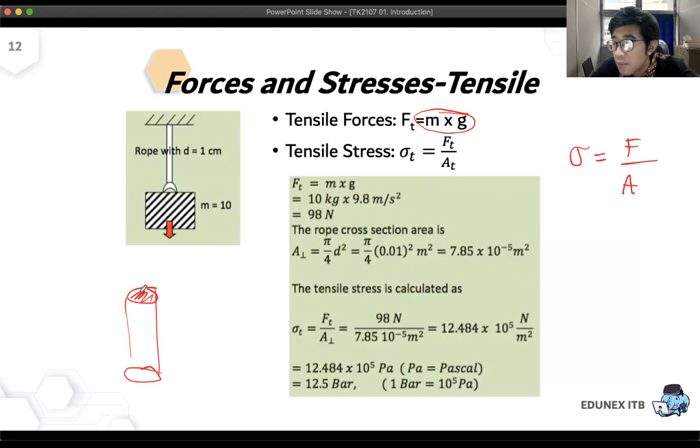So for this one, the area is the cross-section area. So it means if you have this type of rope, the area is this one. This one also is the same. So for the column or the cylinder, the area is this one. You call it the cross-section area, right?

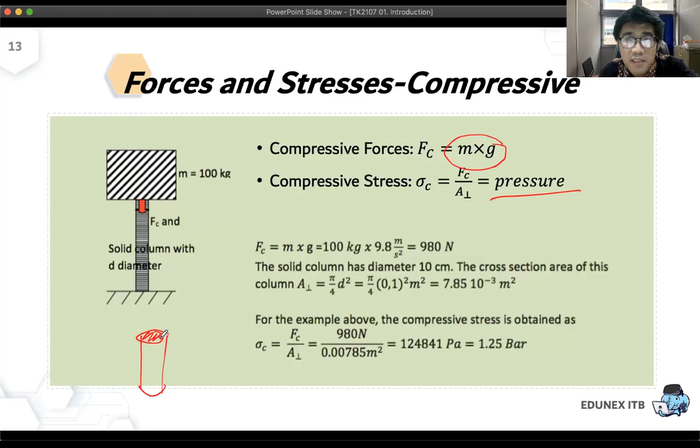Yes, sir, luas penampang. But for this one, the area to calculate the shear stress is this one, the whole... what do you call it? Luas selimut cylinder. What is it in English?

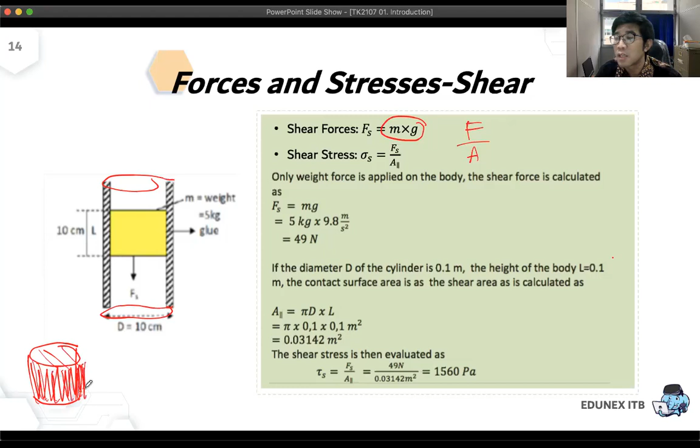Yeah, because the part that has contact with the pipe is this part, not this part. So for calculating the shear stress, you need to calculate the surface area of the yellow cylinder. That's why the calculation is a bit different. How to calculate the area, it will be this one. But for the previous one, the area is this one, right?

Okay, sir, thank you, sir. I understand. Okay.

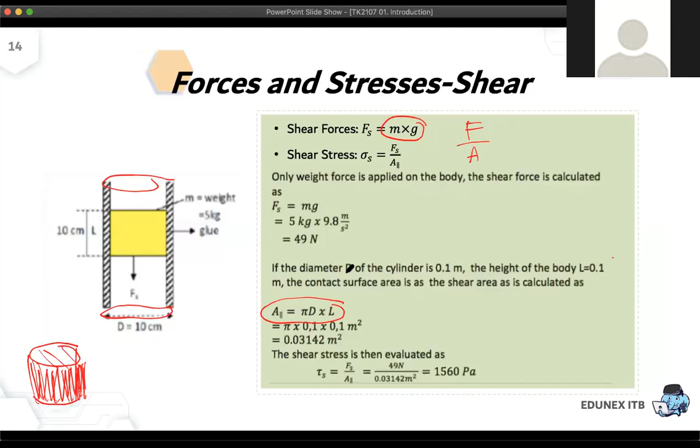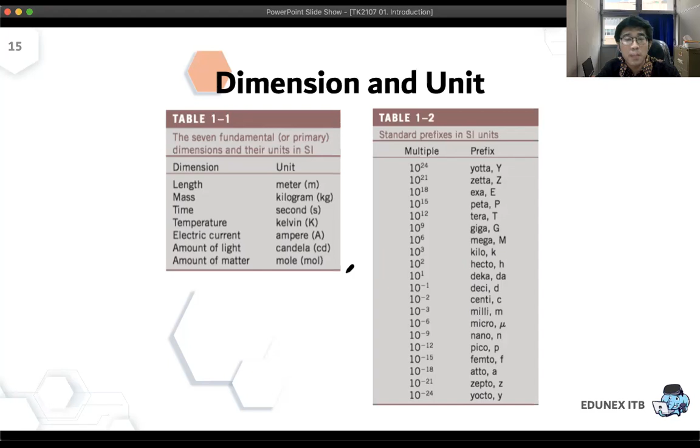Also for this lecture, for fluid mechanics, you need to remember again the concept of dimension and unit, the conversion of dimensions, and some parameters. We will deal with quite an amount of parameters, for example forces, energy, power, area, volume, density, and so on.

Each parameter or each dimension will have its own units. Units can be used as their own derived units. For example, for force, the standard unit is Newton, but you can convert these Newton units into primary units, for example Newton becomes kilograms times meters divided by second squared, and so on.

Also for this, for example, for force units, I've mentioned the standard unit is Newton, but sometimes when you read a different textbook or handbook, you will also find other types of units. For example, in CGS, the unit will be dyne. In American Engineering Units, the unit will be pound force, and so on.

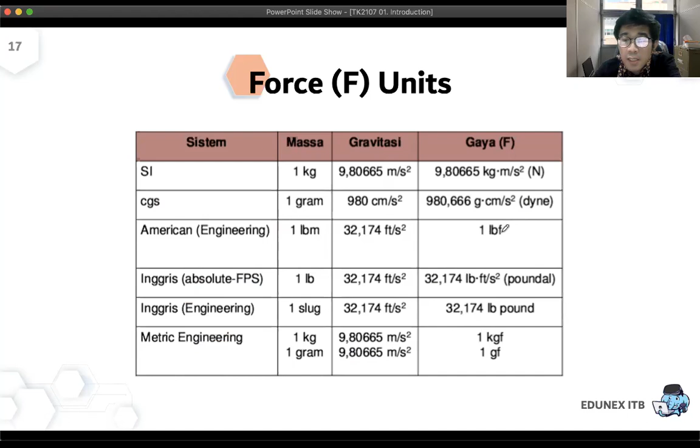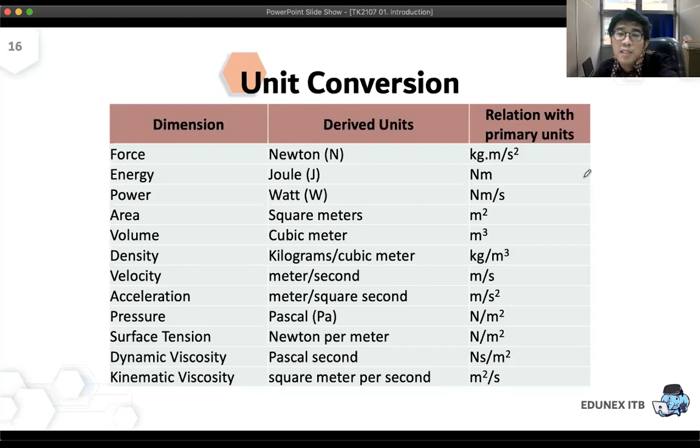So in this lecture, sometimes you need to do unit conversion. Harap diingat kembali beberapa unit yang sederhana, bisa dihafal satuannya, satuan dari setiap parameter itu bisa bentuknya satuan langsung, atau satuan yang dikonversi menjadi satuan primer. Satuan primer ada satuan massa, satuan panjang, satuan waktu.

Okay, for this part, do you have any question?

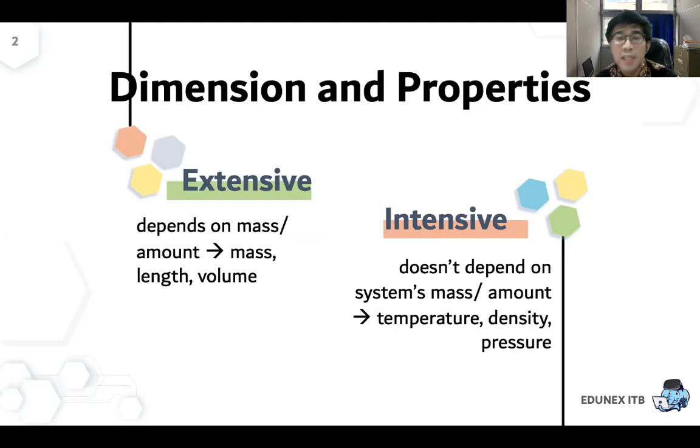Yes, sir. Do you have any question? No, sir. Okay.

So the common properties that we will use often in fluid mechanics are density and also specific gravity. Density is the parameter of the system which quantifies mass of the system divided by volume. The symbol is rho. The unit of density will be mass divided by volume, for example, kilograms per liter or kilograms per cubic meter.

The inverse of density we call the specific volume, so its unit will be volume per unit mass, liters per kilogram or cubic meters per kilogram. But sometimes the density of some substances can also be quantified by the term specific gravity, which quantifies density as the ratio between the density of a substance and that of a standard substance.

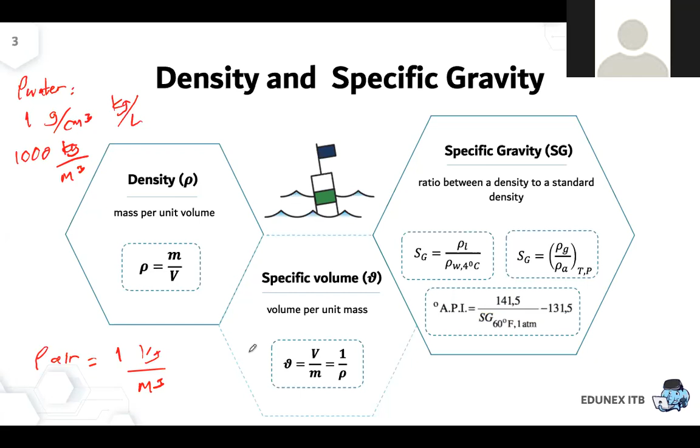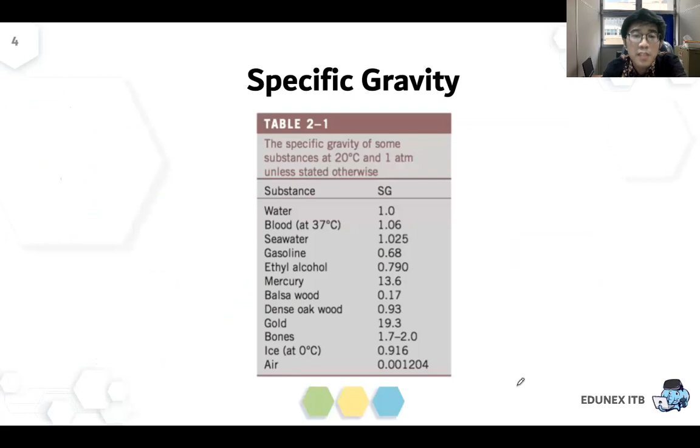Okay. This table shows you roughly the specific gravity. It means the density of a certain substance compared to the standard. The standard will be water. You can see the specific gravity of water is 1. So the standard is water. And if you read the data from some tables, maybe from a handbook, you need to check in which condition the measurement takes place. So for this, the condition will be 20 degrees C and 1 atm, unless stated otherwise.

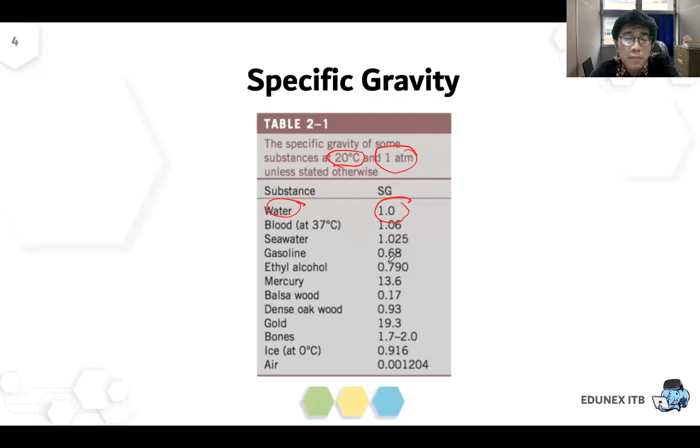So you can see some substances will have more than 1 specific gravity, right? So it means the density is higher than water. And some substances are below 1. This one is above 1, this is below 1. So it means the density is lower. For mercury, you can see the specific gravity is very high. The density is around 13,600 kilograms per cubic meter for mercury. Okay.

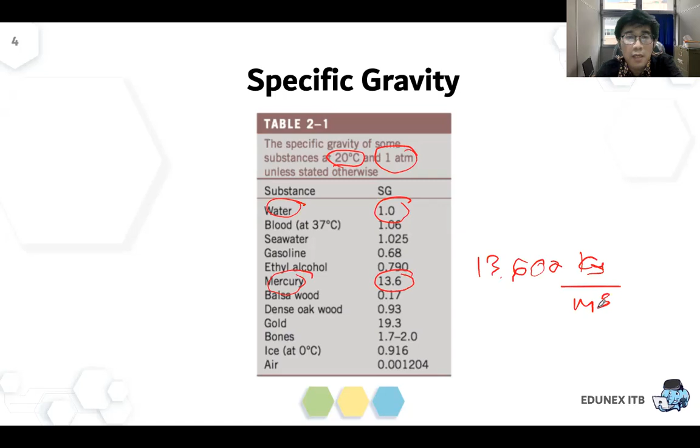Okay. Density is affected or influenced by the temperature and pressure.

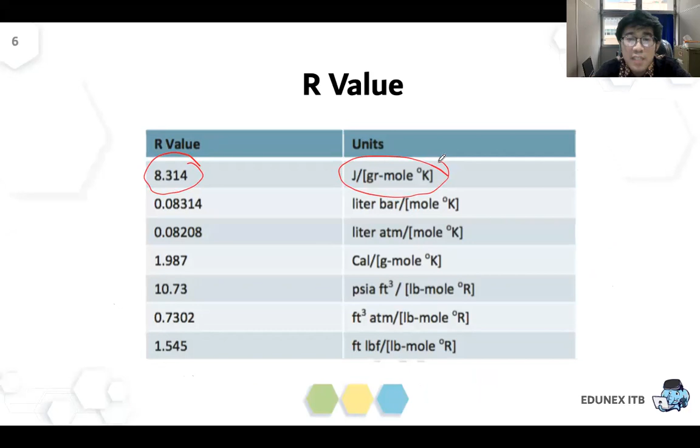So, depending on the other parameters, what is the unit of the pressure, what is the unit of temperature, you need to use the value of R, the gas constant, carefully.

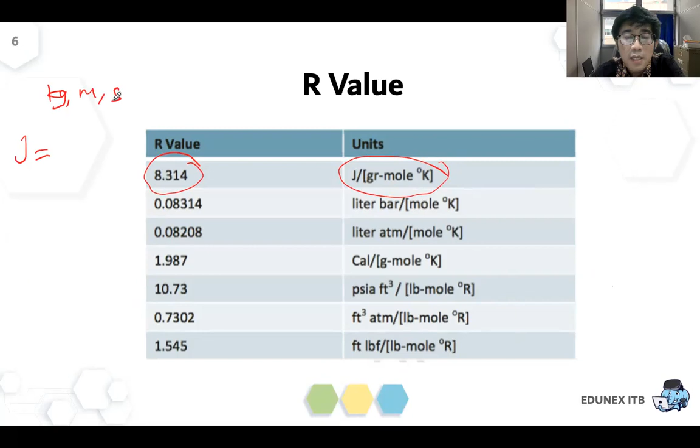And all will be in standard units, right? Standard parameter units. Still kind of confused, sir. Sorry? I'm still kind of confused. Like this one, right? This one also has calories. It's also a unit of energy, right? So joules and calories are both units of energy, but they have different conversions. That's why this one and this one have different numbers. Yeah.

So, sir, the mass in the periodic table, that's all in grams per mole? Yes. Grams per mole, right? Yes. That's all grams?

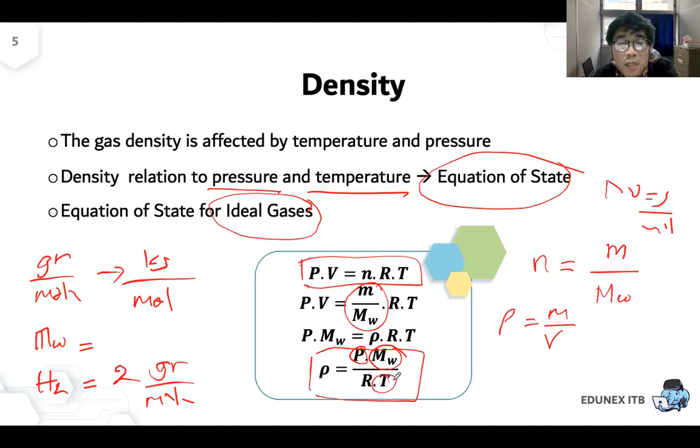Correct? Gram is not the standard unit of mass. So you need to convert it first to kilogram per mole. Then you can use the other parameters in standard units as well. Standard unit means temperature in Kelvin, pressure in Pascal. And R, the standard unit will be joule per mole Kelvin. The value will be 8.314.

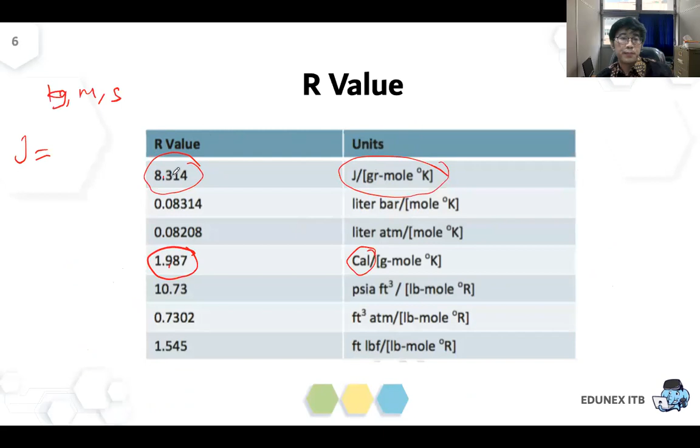Okay, sir. Kind of understand. Okay. Thank you very much, sir. Okay, hopefully the others can understand as well.

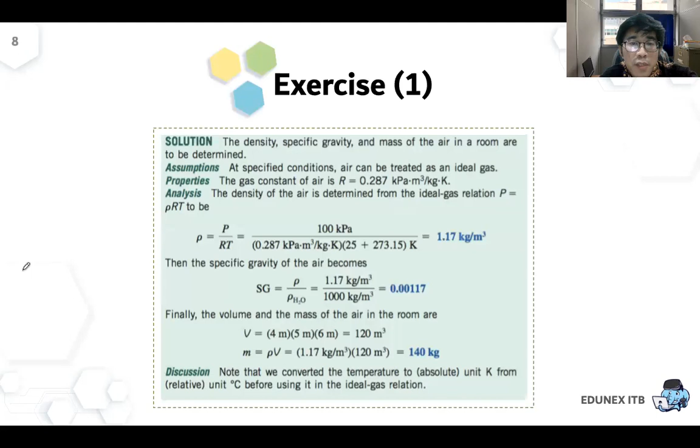Okay. Another parameter that is also important in fluid mechanics is viscosity, or in Bahasa we sometimes call it kekentalan. This parameter measures the ability of the fluid to resist shear stress. So if we apply shear stress to certain types of fluid, the fluid will

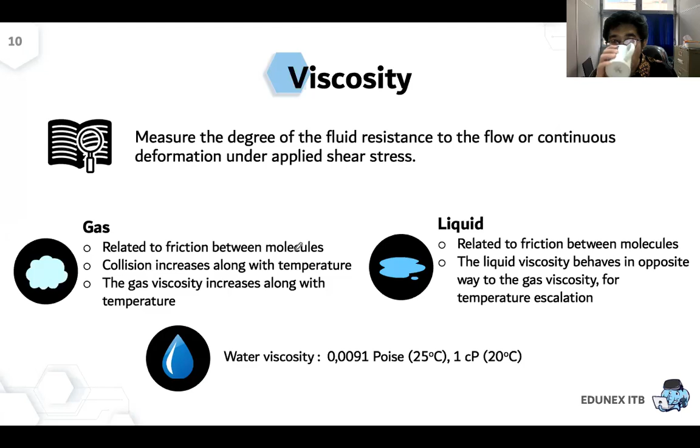Okay, the concept of viscosity we can learn from this phenomenon. So you have two parallel plates, the top part and the bottom part, and then between the plates you will have fluids. And please imagine that the fluids between the plates consist of layers as well.

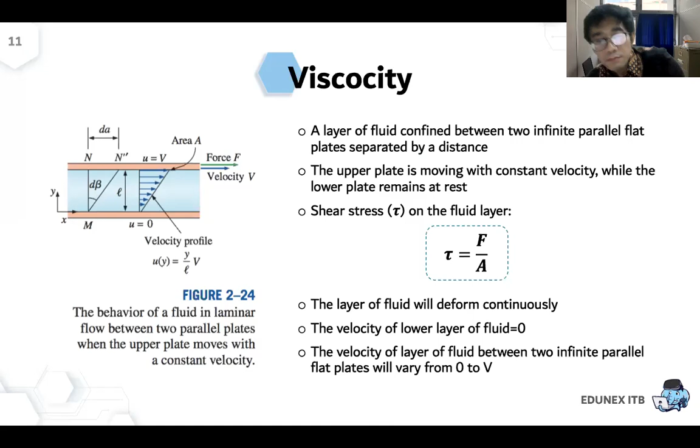So, the shear stress is proportional to the rate of deformation or to the velocity gradient. Based on this correlation, we have two different types of fluid. The first one is fluid whose rate of deformation is linearly proportional. So please add in this part of the slide: for Newtonian fluids, the rate of deformation is linearly proportional to the shear stress. So tau, the shear stress, is linear to the rate of deformation.

And the ratio between the shear stress and the rate of deformation is what you call mu. Mu is viscosity, or dynamic viscosity, or absolute viscosity.

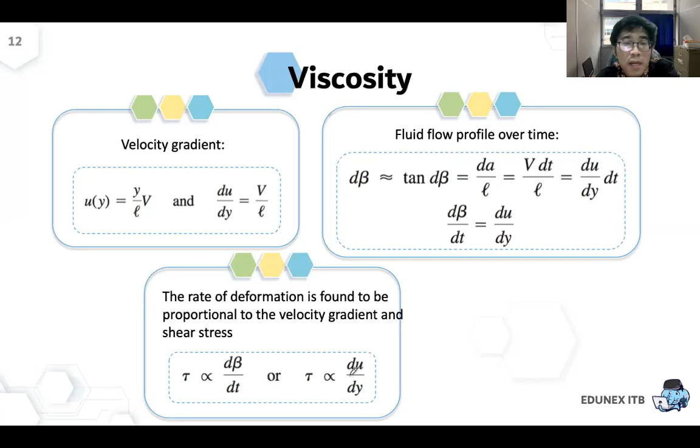Yes, I want to clarify further. So shear stress will always be the same, but what's changing through time is the velocity, the du dy, and the angle d beta dt, right, sir? But there will be a constant, the mu, right, sir? Yeah, both.

Shear stress will be constant, or the value of shear stress will be the same, as long as the force is constant. Ya, dari definisi yang awal tadi, karena shear stress itu dipengaruhi oleh shear force. So as long as the shear force remains constant, the shear stress will be constant. Tapi kalau F-nya berubah, shear stress-nya berubah.

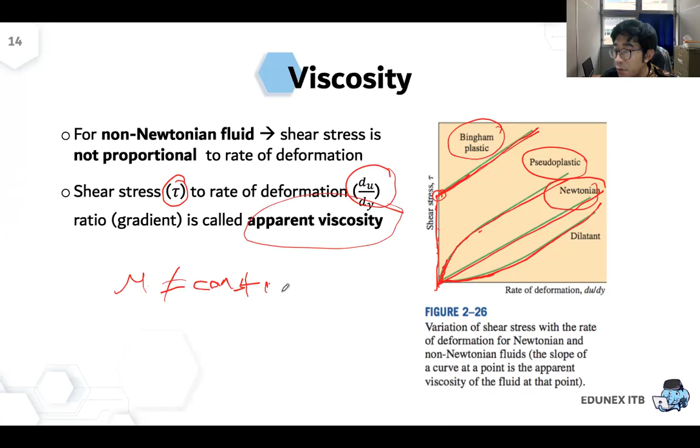Jadi tidak linear. We will discuss these non-Newtonian fluids later in the last part of our semester. And in non-Newtonian fluids, the correlation between shear stress and rate of deformation, we still call it viscosity, but the viscosity is not constant. We just call it apparent viscosity, and this apparent viscosity will be a function of shear stress. Ya, jadi kalau di Newtonian itu mu-nya konstan, tetap, tapi kalau di sini mu-nya tidak tetap, tidak konstan, kemudian dinyatakan sebagai apparent viscosity, dan apparent viscosity ini nanti akan menjadi fungsi dari shear stress atau fungsi dari laju deformasi.

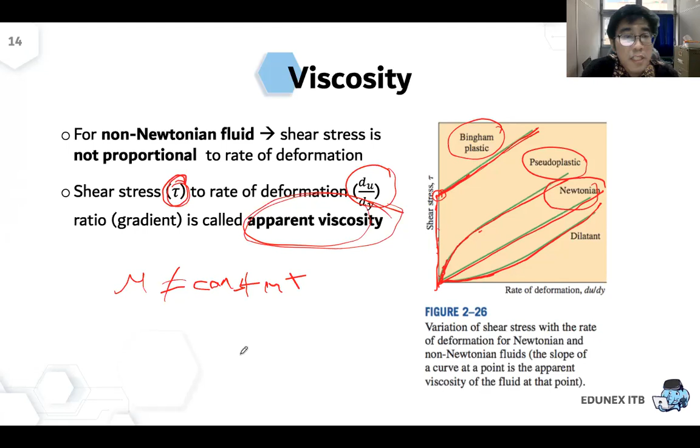Okay. Mu is called viscosity, or dynamic viscosity, or absolute viscosity. Other types of viscosity is kinematic viscosity.

This kinematic viscosity calculates the value of viscosity compared to the density. Because for certain types of fluid, the density will be influenced by temperature and pressure, mostly pressure.

If you see this one, this is the viscosity of air at 20 degrees C at 1 atm compared to 4 atm. So you see the absolute viscosity, the mu, is still constant because the temperature is the same. But the kinematic viscosity will be significantly lower at 4 atm.

Why? Because at 4 atm, the density will increase, right? Because at higher pressure, the volume of the gas will reduce, and then the density will increase, and then the kinematic viscosity will reduce or decrease.

So the kinematic viscosity is usually used to calculate the viscosity in gas, because the effect of pressure is more significant in gas compared to liquid.

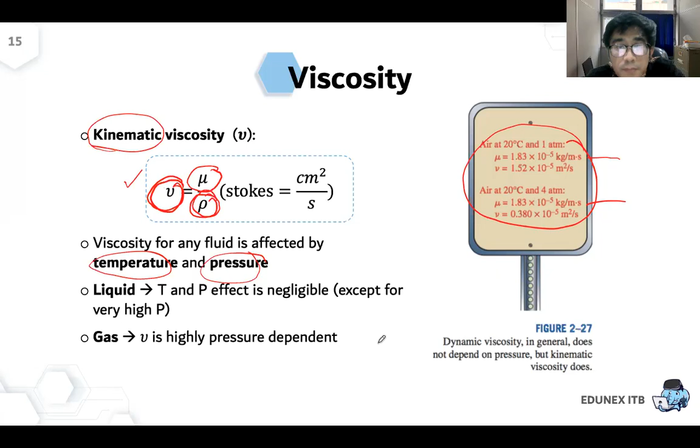Okay, now back to the absolute viscosity, the mu. I have mentioned that it will be a function of the temperature. So you can use certain equations to calculate the mu as a function of temperature.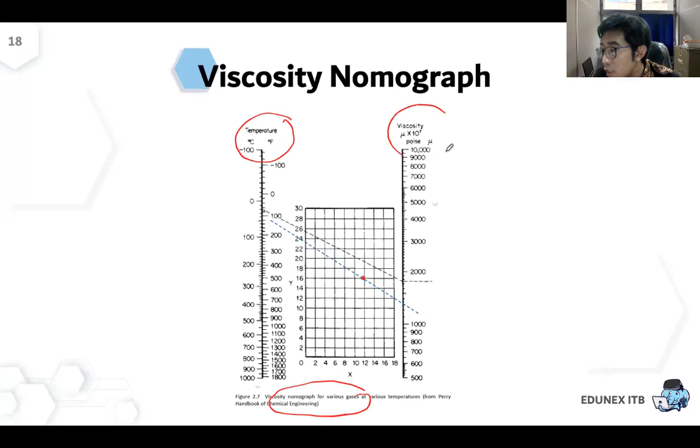Other methods to find the viscosity is by using the nomograph. The nomograph is something like this. Again, you need to check the data or the explanation of the graph. For this one, you can see this is the nomograph of gas, so this one is for the gas. Here you have temperature in degree C and Fahrenheit with certain values, and then you will have viscosity, this one, mu times 10 to power 7 poise.

So how to get the certain value of viscosity of some gas? You will need to have this kind of table. This table correlates for a certain type of gas, showing where is the position in the middle grid, by placing the XY point position of the gas in the grid. So you need to find the XY position of a certain gas on the grid.

So if you have the dot here, there's a red point there.

Any questions so far? Please. No, sir, just give an example, sir. I'm still kind of confused.

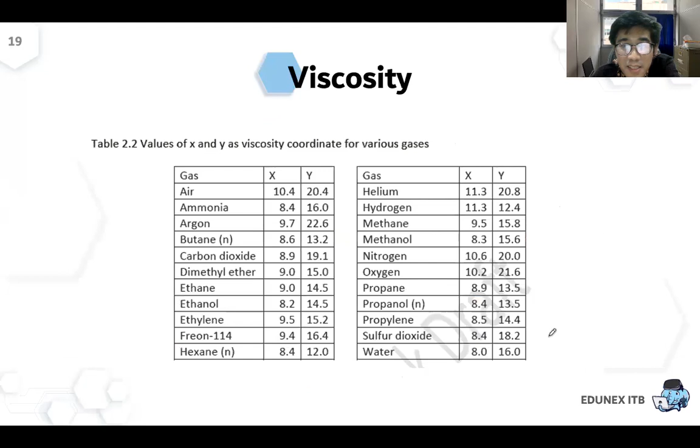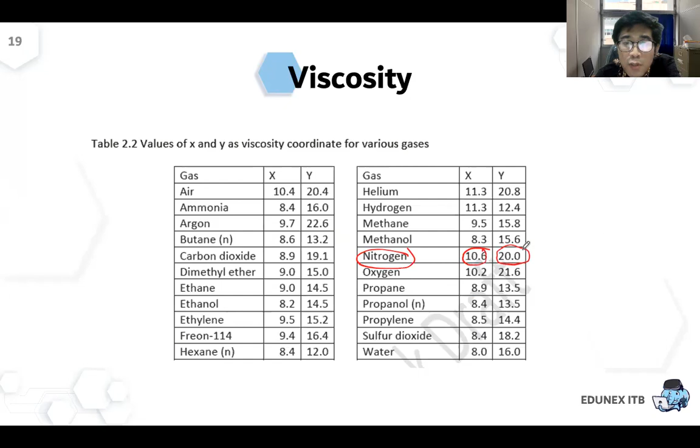Okay, for example, let's see. If you want to find nitrogen, nitrogen is around 10.6 or 11 X position and 20 Y position. So nitrogen is around 11, or 10.6, and 20. You find 11 here, 20 here. Okay, so around this point is for nitrogen. Then, I'll use the line already given in the graph.

So, for example, you want to check the value of the viscosity of nitrogen at, what degree is this? 10, 20, here it's around 20 degrees. So, at 20 degrees C, what is the value of the viscosity of nitrogen?

Then you just take a straight line from this part to this line. Then you go straight until crossing the viscosity line. The temperature and viscosity are a function of each other, remember this.

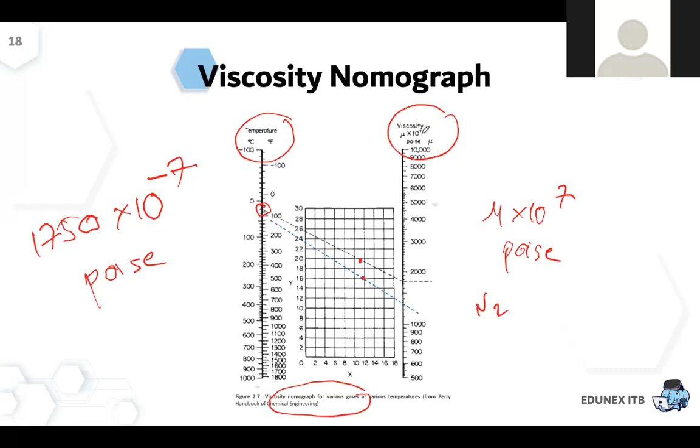So the way is, the value that you get from taking the straight line, you multiply by the inverse of 10 to the power of 7, or 10 to the power of minus 7. So around 1.75 times 10 to the power of minus 4 poise. Thank you, sir. I understand. Okay, thank you, sir.

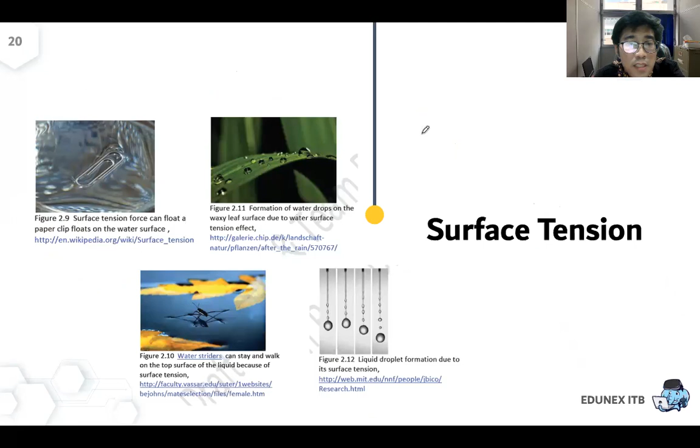But in English, the term becomes tension. Because stress is force divided by area. But this one is not divided by area, but force divided by the length. What's the English for path length? So the force divided by the line experienced by the fluid.

For example, this one is the thin film, and then you have a rigid wire frame around the thin film, and at one position you stretch the wire in this direction by applying a certain force. Okay. As a result, the thin film will maintain its shape. What's that in English? Kevin, can you help me translate? So the surface will try to keep its shape and try not to break, right? Yeah, right. The thin film will keep its shape, so it will not break.

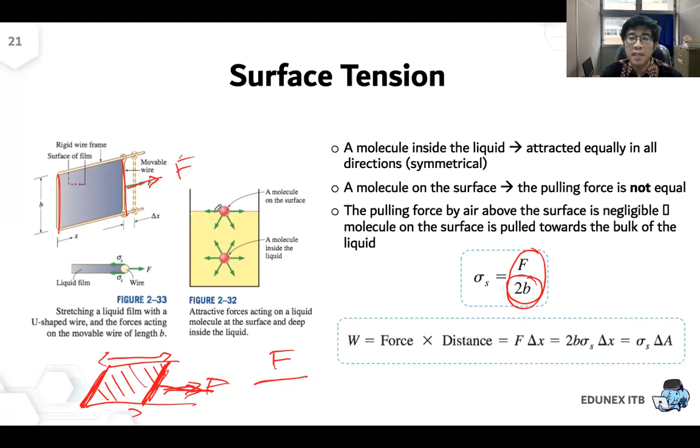So the liquid can have a certain amount of surface tension. This is the value, because the formula is F divided by the line. So the unit will be unit of force divided by unit of length. How to calculate? By using the formula F divided by the line that's perpendicular. If you are using this kind of system, F is mass times gravitational acceleration divided by the total length of this part and this part.

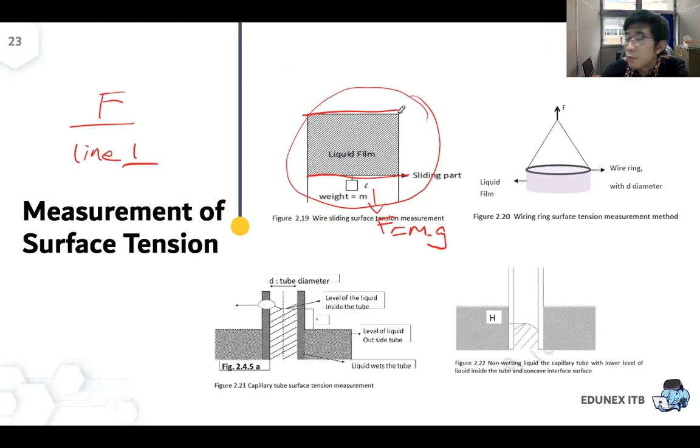But for this one, for example, you have a ring, you put it into a liquid and pull up the ring, then the force will be upward, and the line that's perpendicular will be the circumference of the circle. Sir, for the circumference, will you also multiply it by 2? No, the circumference is not multiplied by 2. This one is 2 because there are 2 sides. Here the force is upward, so the perpendicular line is this one. Here the force is downward, so there are 2 perpendicular lines.

Okay, sir. But if it's like a cylinder, do we need to take into account the base of the cylinder? Good question. No, this is not a cylinder. First you have liquid inside a container. Then you have a hollow ring. You put the ring inside the liquid and pull it up slowly. Then the surface comes with the ring. So the line perpendicular to the force is only the circumference of the ring. Okay, sir, I understand. Thank you very much.

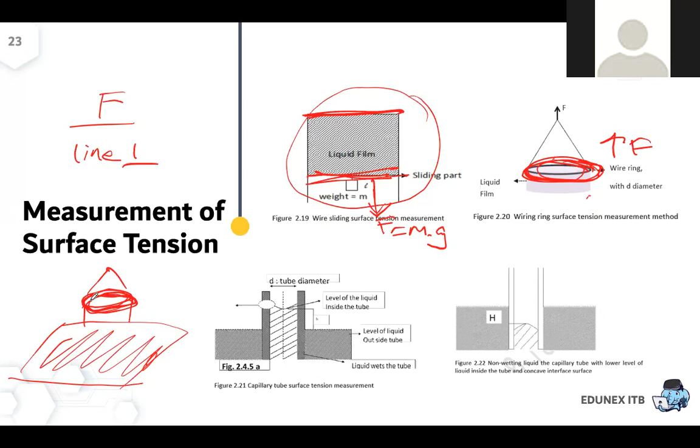Okay. An application of surface tension is the capillarity effect. Maybe you still remember what a capillary is: a pipe with a very small diameter. The capillarity effect is mainly affected by cohesion and adhesion. Cohesion is the interaction between particles of the same kind, while adhesion is the interaction between different particles.

For example, you put water and mercury inside a container made from glass. Water will have higher adhesion compared to cohesion; adhesion with the glass is bigger than cohesion between water molecules. Mercury will have higher cohesion between its molecules compared to adhesion with the glass.

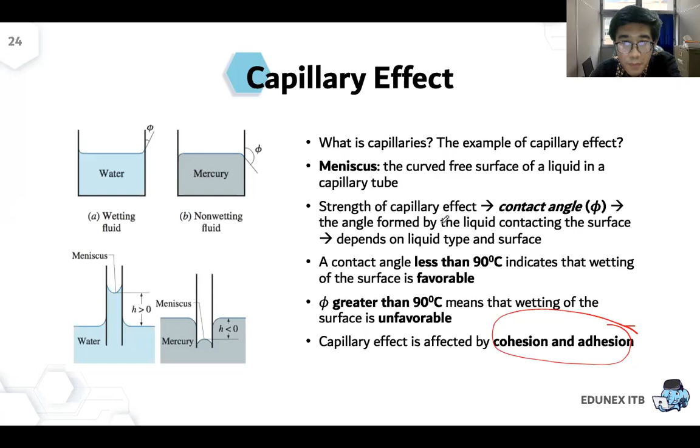Cekung is concave, right? And then the cembung one is convex. Okay, we also will have the term contact angle. So if you put a water drop onto the glass surface, it will spread out like this. But if you put mercury on the surface of the glass, it will form a shape like this. So the contact angle is the angle between the surface and the liquid. Wait a minute. So this is the contact angle. And for this one, this is the contact angle.

So a contact angle that is less than 90 degrees indicates that the wetting of the surface is favorable.

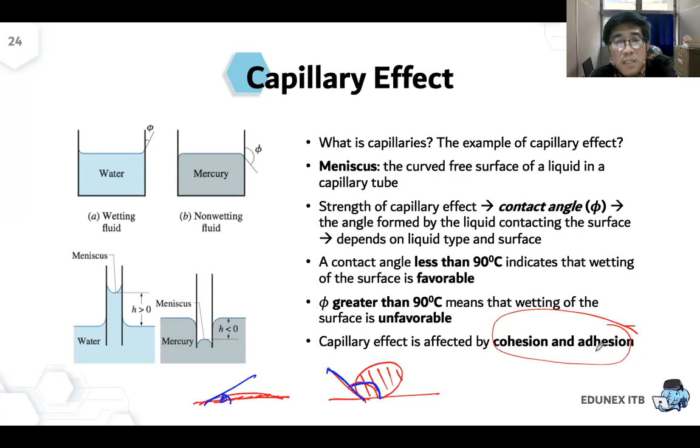Okay, we can see the application of the capillary and the contact angle. This is the example. If you put a capillary tube into the liquid, in this example water, then the liquid will rise, right? So you can use the principle of contact angles and the capillary effect to calculate how much fluid can rise above the surface of the normal liquid.

So you can calculate how high. How to calculate this one? You can check from this one, the part shaded blue. For this one, the liquid will remain constant, right? So it means the balance of the force equals 0. Thus there is no additional force experienced by the liquid. Sigma F equals 0.

The balance of the force will come from the weight force. Weight force is mass times g, right? So the mass will be density times volume. And the volume will be this one, the volume of water filling the shaded part: pi times r squared times h. This force is directed downwards. So if sigma F equals 0, there will be an upward force equal to the downward force.

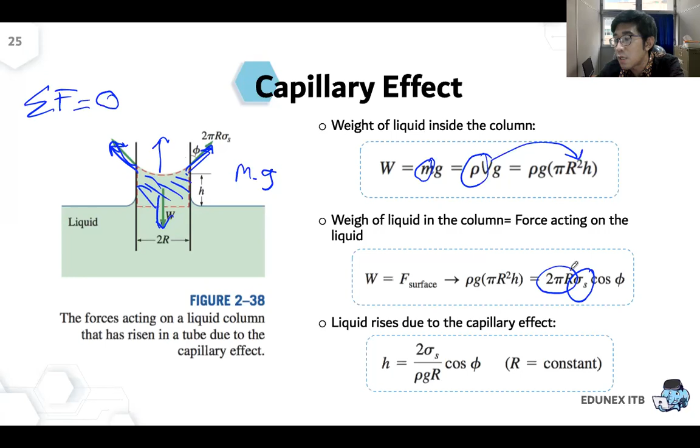How to calculate surface force? First, you need to know the value of surface tension. And then you multiply the surface tension by the line perpendicular to it, which is the circumference of the liquid. Then, because of the direction of the force, the upward component will be the surface tension force times cos phi. What is phi? Phi is the contact angle between the liquid and the surface.